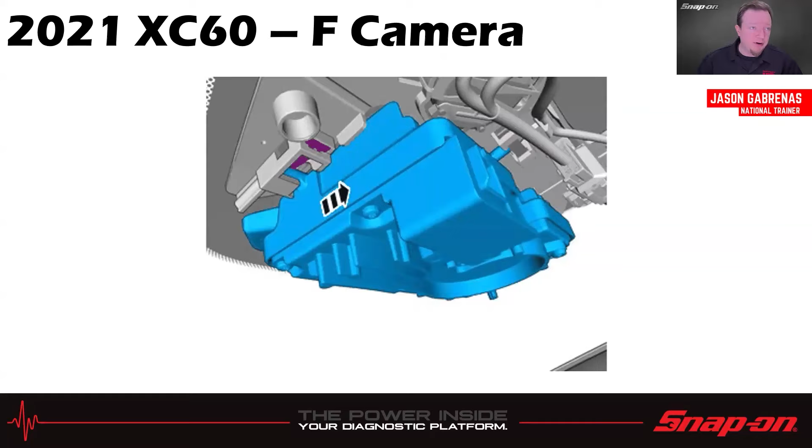It's got 3 radar. It's got 1 in the front for adaptive cruise, 2 in the back for a blind spot monitor. And it has 12 ultrasonic sensors. So it has park assist and also parking space detection because it can help you with the parallel parking situation. So it has 12, 6 in the front, 6 in the rear. So front camera, as usual, is mounted up in the windshield, upper part of the windshield, just like pretty much any other car. And that's kind of a blowout of that.

That is going to be part of what they call the active safety domain master in Volvo. So that covers a few things in the active safety. So of course we have codes and data. We'll go into functional tests and special functions, and you see there is a radar and camera calibration combo in there. So active safety domain master needs to be calibrated only if one of the following has been fulfilled.

So if new modules or new hardware has been installed, either the camera or the radar, control module has been removed and reinstalled in a different position, or a code for a missing calibration has been set. So not necessarily all that often. Calibration of radar and cameras is performed by starting respective calibration procedure and driving the vehicle. So it is a dynamic calibration.

When the calibration is started, the text message is shown on the dash. When the message disappears, the calibration is finished. And then they give you instructions on how to drive it, at least 60 kilometers an hour, preferably above 80. Lower the speed, the longer it's going to take. Keep the vehicle at constant speed. 10 car lengths with the vehicle ahead of you, that might be tough, but driving the lane closest to fixed objects like guardrails and signs.

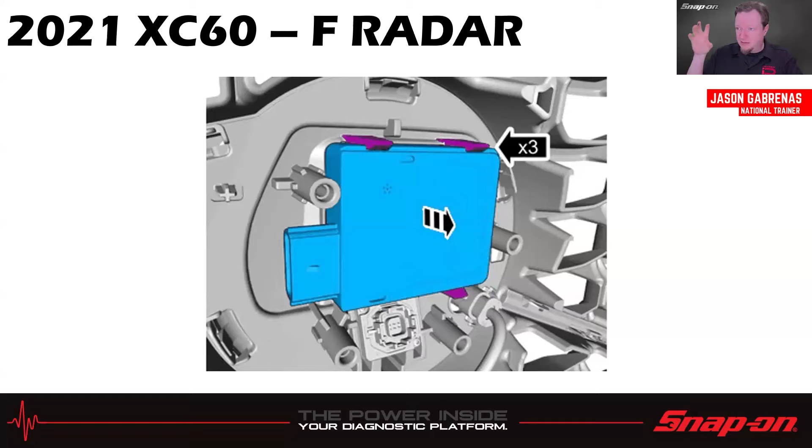So the time the calibration takes depends on how well the above conditions are followed. Should take about 5 to 15 minutes, but can take longer depending on driving conditions. And then you would go in there and it says, yep, now we are in calibration mode, and then you would drive the vehicle under those conditions. There's also a radar module that is associated with that, right? So it's a combo calibration, like I said, but the radar on that's going to be in the front behind the emblem on the grille.

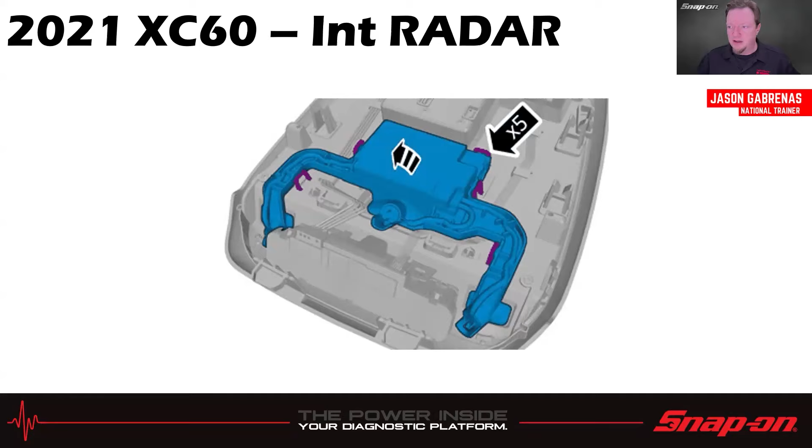There's also an interior radar on this vehicle, so that is for people detection, right? To see if there's people in the seats and so on. So we saw that back with Tesla as well, that they were using radar in there. So something Volvo is doing as well. Rear radar mounts to the bumper there in the back corners of the bumpers. You can see the mounts. And that would be for side object detection, left and right.

So we'll go into functional tests, special functions, lock or unlock the side radar, or reset them to factory default when you need it. So the lock or unlock is: side obstacle module left and side obstacle module right are automatically locked to the side of the vehicle where they're mounted. The locking positions are checked at the beginning of each driving cycle. The locking position needs to be reconfigured if one or more of the following criteria are fulfilled.

Codes that indicate the wrong locking position are active, or they've been mounted on one side of the vehicle and moved to the other side of the vehicle. I don't know, swapping sides for some reason. They must be identical, but I don't know. I guess if that's the case, maybe if you disassemble it, reassemble it, and forgot which one was on what side, I suppose that's a possibility.

If they're moved from one side of the vehicle to the other, it needs to be unlocked after it's reinstalled. It will then automatically lock to the side where it's mounted. They have different software. If one is moved, it needs to be reloaded with the correct software. So they don't actually work interchangeably. They do have different software. If a new one is installed, it will automatically lock to the side it's mounted on.

Good to know. So we have unlock or lock. In this case, it's unlock both sides, and then the other one was lock. And it goes through, and it does its thing. It's a software thing, I guess. Next one's the rear camera.

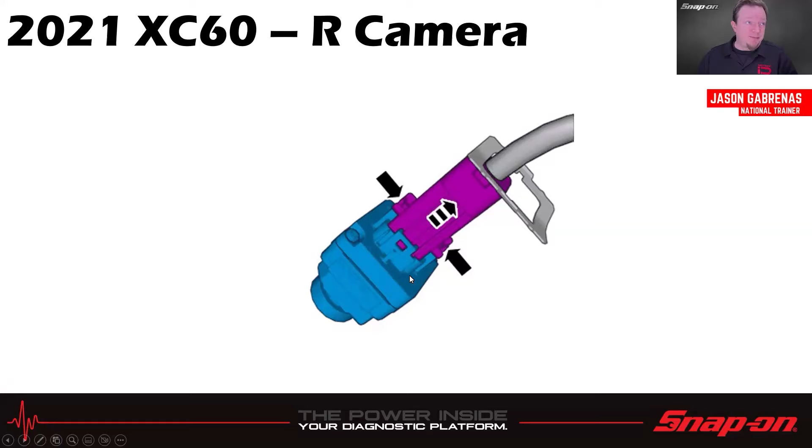So rear camera is actually part of the parking assistance camera, is what the module that's in. So we have functional tests there, special functions, and the camera view. So a routine activates the camera view for the parking assistance camera. Parking assistance camera displays the image on the center console display. The image includes the part of the bumper as well as the tow bar if it exists.

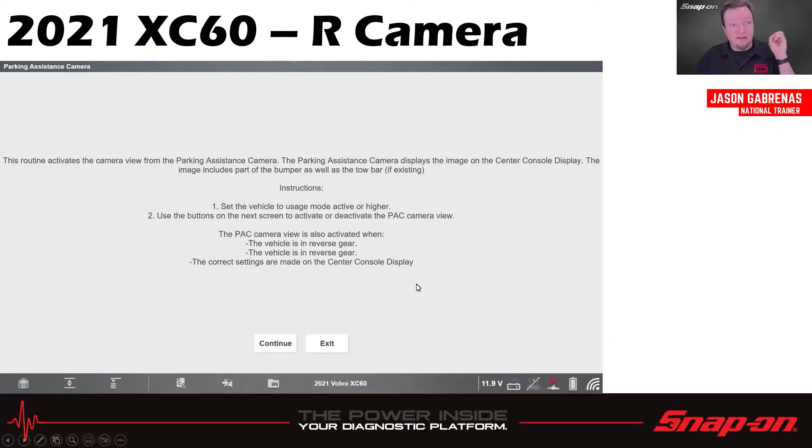It'll be also activated when the vehicle's in reverse and the correct settings are made in the center console display. So this is to force the display on in case you need it for diagnostic purposes. So activate and deactivate, on or off. Camera view activated. Would you like to deactivate it now or exit? So you can just exit.

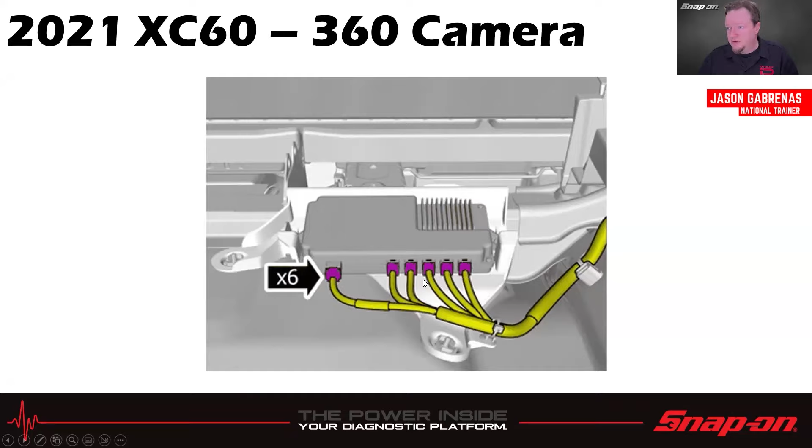360 camera. They even have a picture of their fancy video box that's kind of in the back of the vehicle as well. So there's 6 individual plugs that go in there. And this is actually not under the ADAS category. This is under the wide angle vision module down here a little ways. That's actually under steering and chassis. The functional tests, special functions, calibration of the park assist cameras. Set the vehicle to active, so basically turn it on.

Wide angle vision module, that's a big word, concatenates the video from 4 parking assistance cameras using the visual park assist 360 view on the center console display. Control module has a built-in online calibration procedure. Good calibration has smooth transitions between the different cameras' field of view. Calibration procedure is by default disabled but needs to be enabled if DTC for missing calibration is set or if the module has been replaced.

Calibration may also be needed after replacing a camera itself. Online calibration does not have the same potential as factory calibration. It is therefore important that this calibration is only started if a visual check confirms that the calibration is needed. So I continue. And then you could enable calibration, check the calibration status, and then the driving instructions to drive it. And they will give you the driving instructions once you enable it as well.

So now enabling will start the next time the vehicle is driven. The calibration can either be completed by driving the vehicle according to the preconditions below, or the vehicle can be returned to the owner for finishing the calibration. Calibration status can only be displayed on a diagnostic tool. So I would say, to be nice to your customer, you'd probably want to do this before you give it back to them, right? And then there's your different stuff.

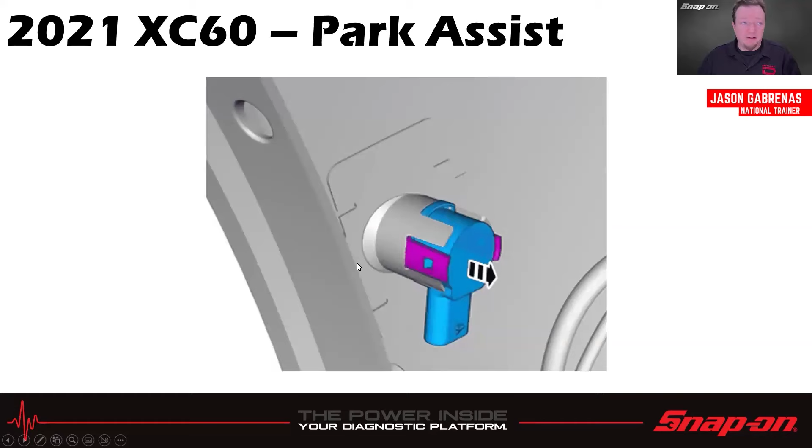May vary between 5 to 20 minutes. So 5 to 45 kilometers an hour, between 7 and 15 kilometers an hour. So it's actually, they want you to go kind of slow there. All right, and then the park assist sensors don't have anything related to them scan tool wise.

Next one's a 2019 XC90. So this one also has 5 cameras, lane keep and a 360 view. Also has 3 radar, adaptive cruise and blind spot monitor, and 12 ultrasonic sensors for park assist and parking space detection as well. Now, I did notice in this one, looking through the information, they don't release a large amount of information from Volvo for some reason. They always kept it close to their chest.

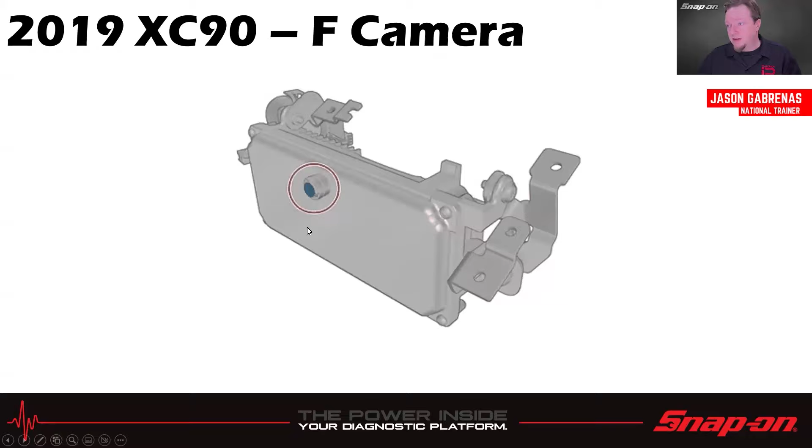But according to what I can tell, anyways, based on the information that I have, the radar and the camera are all in one unit. So that must be the radar, and then the camera's right there. As far as I can tell, that's how it works. And then they made a change in like 2020, so that's why on the 19 you see that. Active safety domain master once again on that.

Functional test, special functions, radar and camera. It's going to be pretty much the same thing, just on this different car. I think there might be slightly different wording on the screen. Yeah. So it can be performed any time of day or night, but should be avoided in heavy rain, snowfall, fog, wet roads at night, dark roads without visible or narrow road lines, and radar calibration, heavy rain and snowfall. And then it tells you how to drive the vehicle again, at least 10 car lengths, and then it runs.

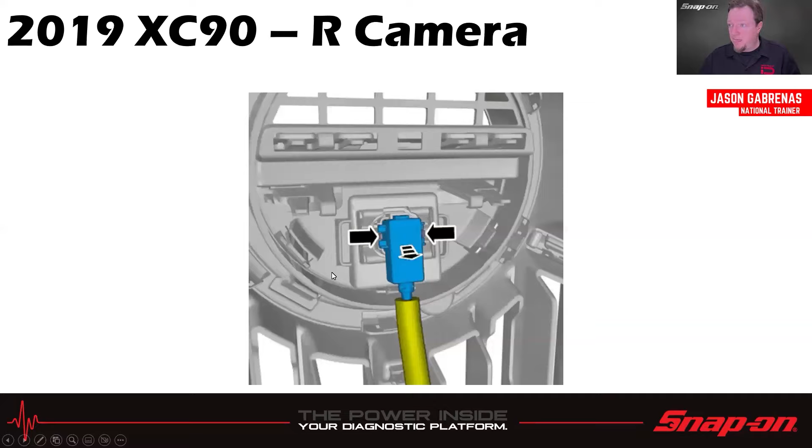Same deal. Rear camera, which kind of plugs into the rear there, and that is once again on the park assist camera. Functional tests, special functions, and then that turns the camera on again, just like the other car did. It's an activate and deactivate function. And rear radar slips into a little bracket there on the inside of the bumper. And that would be side object detection left or right.

Functional tests again, special functions. And this one actually has calibration for the side object detection instead of the lock and unlock feature. Removes the current calibration from the side object detection control module left and right and restarts a new calibration. So you can see how they kind of changed the procedure over the years. So this was a little bit different. The other one was just basically a lock and unlock, and it learns itself.

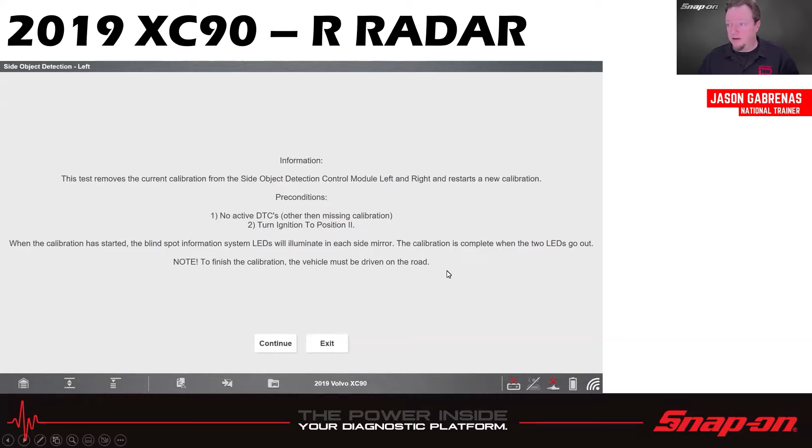When the calibration is started, the blind spot information system LEDs will illuminate in each side mirror. Calibration is complete when the 2 LEDs go out. To finish calibration, the vehicle must be driven down the road. So you need to take it on a little road test again. Park assist, nothing scan tool related in there. All right, now last vehicle is a 2019 S60.

So this one, once again, very similar to all the others. 5 cameras, lane keep and 360 view, 3 radars, adaptive cruise and blind spot monitor, and then 12 ultrasonic sensors, 6 in the front, 6 in the back for park assist and parking space detection. Now, in this case, the front camera is kind of that all-in-one model again, just like the last one, because that's kind of like the older model. Like I said, they made that change in 2020, I believe.

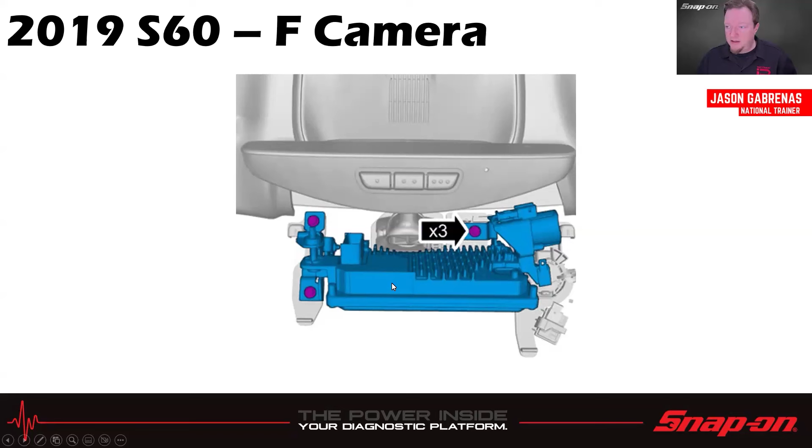So there's the whole assembly there, and you can see the mirrors there. So kind of the whole flat front points out. That makes me believe it's a radar. So that's active safety domain master again on that one. 360 cameras. Here's one of the ones in the mirror. That has a similar calibration to the other ones, a wide angle vision module on that one.

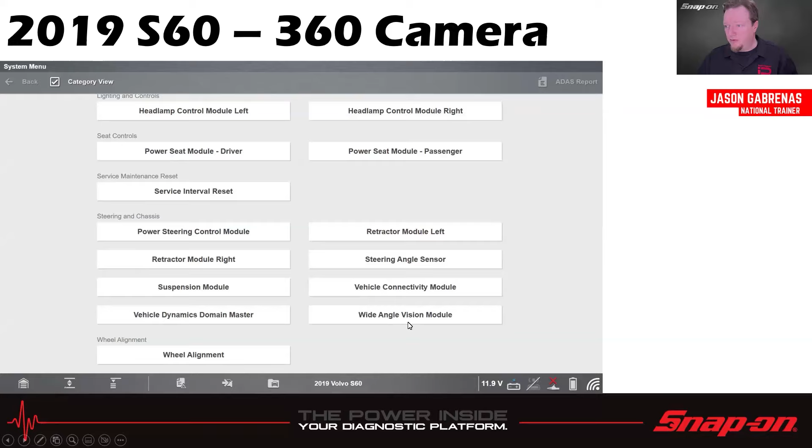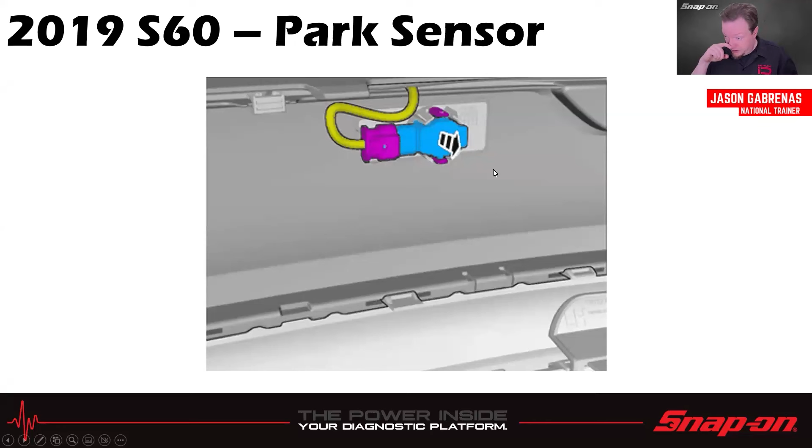Then we have the rear radar. That one is the side object detection on either side, and that one's going to be very similar to the other 2019 we had, where it does the calibration. You have to drive the vehicle. And then, of course, the park sensor has nothing necessary for it to be reprogrammed, reset, relearned or recalibrated. Now, I do want you to note every single one of these vehicles falls under this category as well.

But pretty much starting in 2016, Volvo started having their models use Ethernet protocols, so DoIP, Diagnostics over IP. So if you have a fairly recent Snap-on tool, it's already built in on the board. You don't need to worry about it. But any of these tools right here, so D8s, MODIS Edge, MODIS Ultra, Solus Legend, Solus Edge, Ethos Edge, P1000, those all need this special cable in order to communicate with Ethernet vehicles. There's a part number right there. It's got this big plastic thing in there, and that's how you know what that cable is for, because the regular cable does not have that.

And then, like I said, the newer ones with the notched cable, like the D9s, D9, D10, Solus Plus, Apollo Plus, those tools and newer don't need it because it's already built in on the board. And if you have a Zeus or Verus Edge without the black scan module, you need the black scan module. They originally came with red ones, and that's how you can tell the difference. We're up to number 10, I think, scan module. And of course the wireless Triton uses that module too, so you wouldn't need to worry about that.

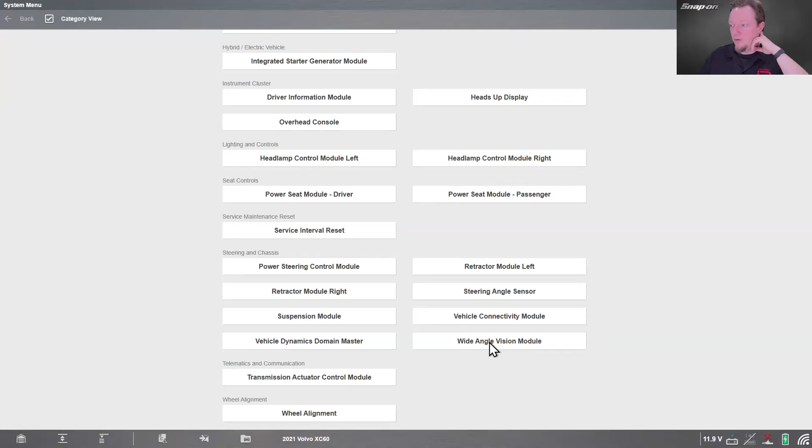Let's see what we got for data on that. Alignment angle and whether or not it's calibrated. Easy enough. Guess you probably don't need much with that anyways. The park assist camera has data too. Voltage and temperature. Simple enough. And then that one was the park camera view, turns on the monitor. And then further down here under steering and chassis, we see the wide angle vision module. And that has the calibrating of the park assist cameras there.

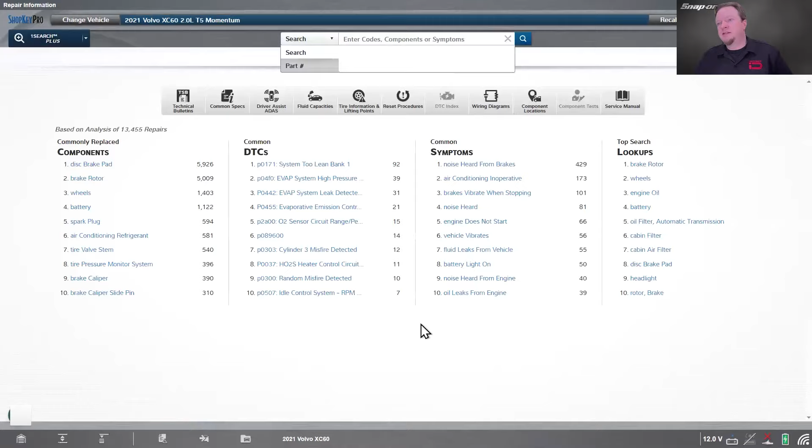Let's go take a look in guided component. Oh wait, no, we're not going to have those. Let's just go look in here real quick. Like I said, there's not a ton of information that they release on it, but there is information in here. Just sometimes it's not terribly intuitive how they lay it out. So see, this is under ADAS. They have it listed under brake controls, combined instrument sensors and warning systems, electrical equipment, media communication, and navigation. So that's all the ADAS stuff.

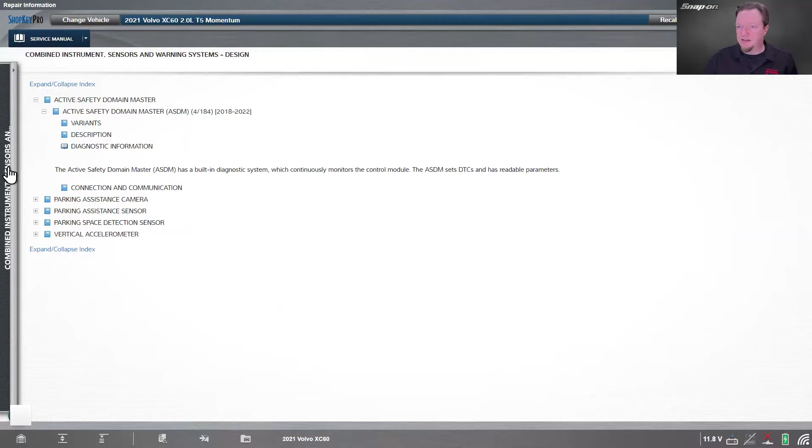And then you go in here, and it gives you some lists. So active safety domain master, diagnostic information, built-in diagnostic system. So it's going to spit out codes. Installation instructions and accessories, park assist, electrical equipment, heads-up display, rain sensor, cleaning the windshield. There we go. So here's all the modules on the vehicle. Some of them are ADAS, some of them are not. Like I said, it's not as intuitive the way that they have their information laid out. So active safety domain master is there. Let's see.

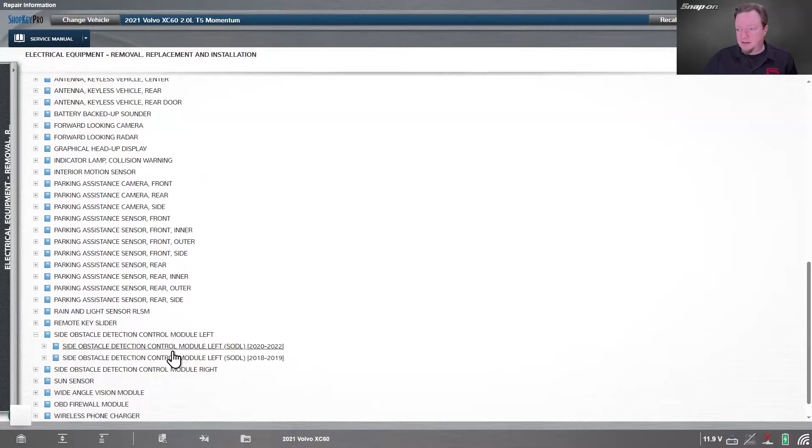Park assist camera, front rear side, park assist sensors, rain and light sensor, side object detection module. So let's see, 2020 through 22. Removal and installation. There's a module right there. See where it pops out of the thing. So, like I said, not a ton of well-organized information, anyways. They do give you enough to work on it, but that's about it.

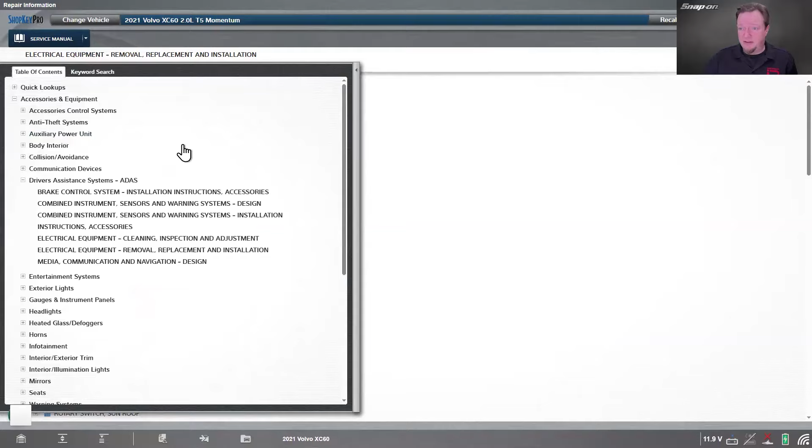They've always been pretty stingy with information. I remember it took us forever to get them in the scan tool because they just weren't forthcoming with the information. So. But we ended up having the Vantage Pro being the factory tool for them. So I guess it worked out.

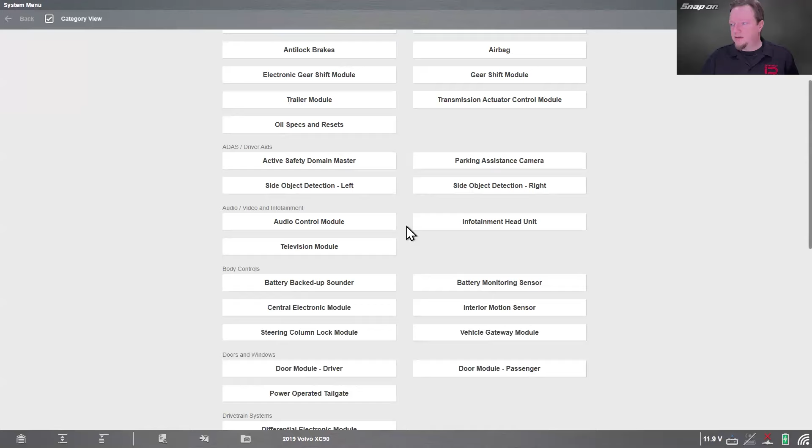So once again, it's going to be very similar on this one since the years are very close and the modules are going to be pretty close. They're going to be pretty much the same thing. And like I said, no targets on this. It's just a drive it, set it, and drive it. So we're going to set it to this, then hit continue. It executes, and then we would drive it. So it says you must be driving it. And that's it. Put it into learn mode and drive it.

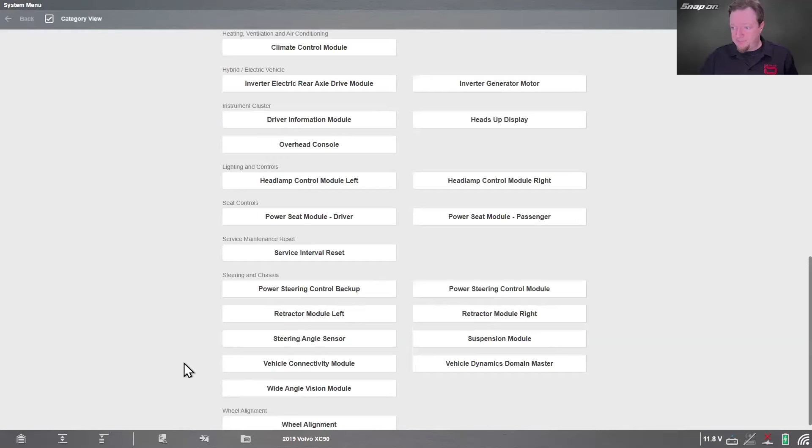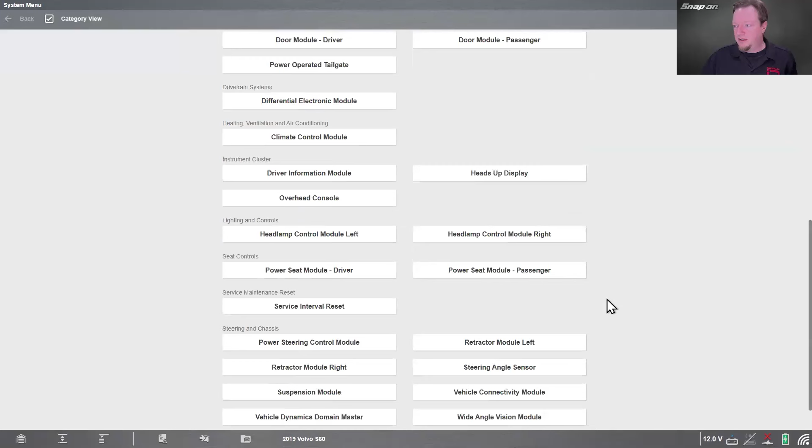Very easy. All right, and then it should be the same for the S60. Very non-confusing, at least when you're doing this stuff. These seem like a pretty easy one to do. Some of them you have to get out the whole rig and put up the banners and the targets and all that other stuff. So yeah, it's going to be the same thing here. Active safety domain, park assist camera, and then down here will be the wide angle vision module for the 360 camera. So as long as you know where to find it, makes it easy enough.

And like I said, it appears that it's pretty much mostly dynamic. Didn't find anything that needed a target at the time, so looks pretty straightforward. So once again, I usually say at the end of these, if there is a brand that you want to get your feet wet on, this might not be a bad one. Some other manufacturers where you need like 20 different targets, it's not that great to start on. Maybe that's a next step, right? So Volvo seems to be pretty easy when it comes to ADAS, and that is ADAS on Volvo.